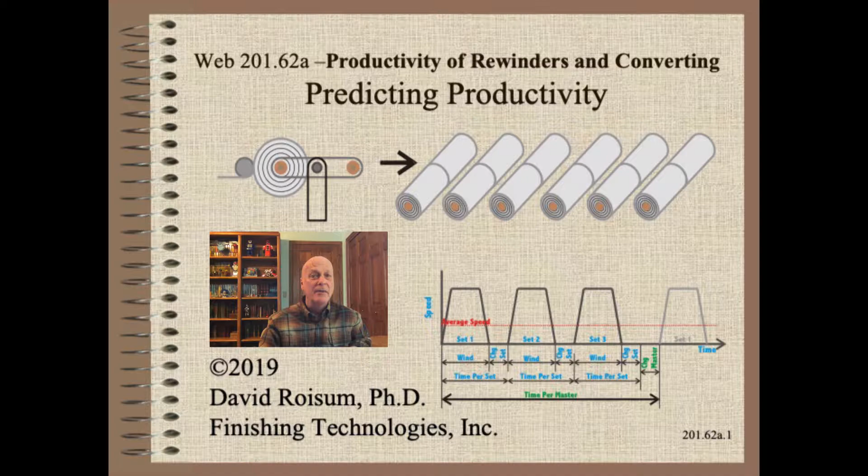The motivation for analyzing productivity is obvious: money. However, we first need to understand the elements of productivity before we can minimize rewinding and converting department costs. One large cost area is labor. It can cost upward of $250,000 for each 24/7 position. Of course, your people aren't paid that much. However, consider that each 24/7 position takes 4 full-time workers to cover. So take the yearly wages of 4 hourly workers times 1.5 to cover benefits, and you get costs that are notable.

Another notable cost includes waste, because each additional process step adds more waste. One example is the waste at the top and the bottom of every wound roll. There are other sources of waste as well. Also, equipment is expensive. A rewinder may cost $20,000 to $20 million. Converting equipment can even cost more. To this initial cost, we also must add ongoing maintenance costs such as parts and labor.

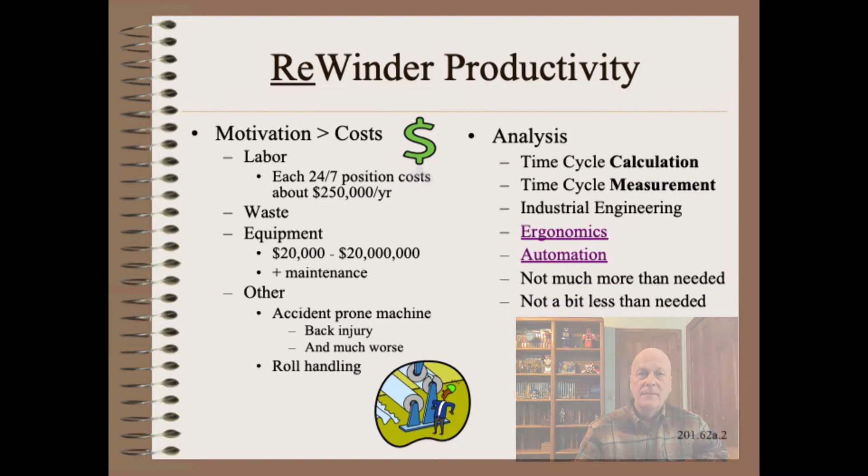The heart of a rewinder time cycle is the speed versus time graph. Here we show the heartbeat of an athlete, strong and steady. In this example, we are rewinding 3 sets per master roll. Of course, the technique would apply to any number of finished sets per master roll, from 1 to 100. Note the repeating elements: accelerate, run, and decelerate, followed by a finished roll set change. At the end of the 3 sets, we must add time to change out the master roll.

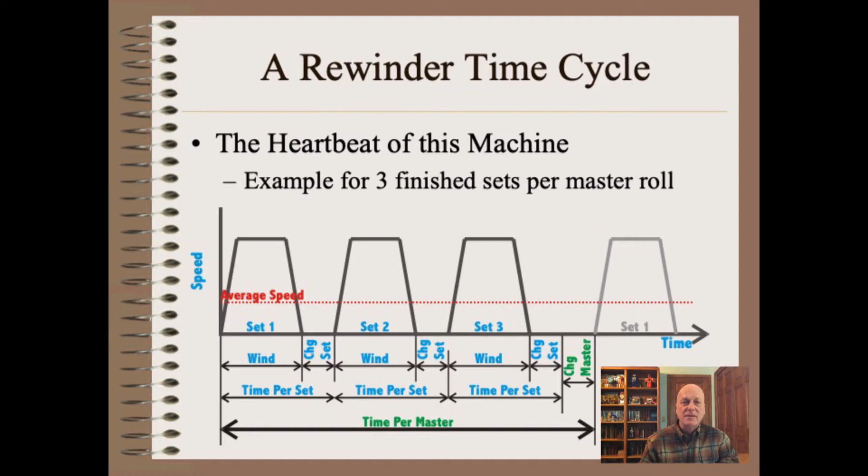The individual times for each of these elements can be calculated and summed to give the time to process 1 master roll. Since we must know the length of the master roll, the average speed or productivity of the rewinder is the length divided by the time per master roll. This average speed is like the problem of the tortoise and the hare. The rewinder varies speed like the rabbit, but must keep ahead of the steady input from manufacturing, like the tortoise.

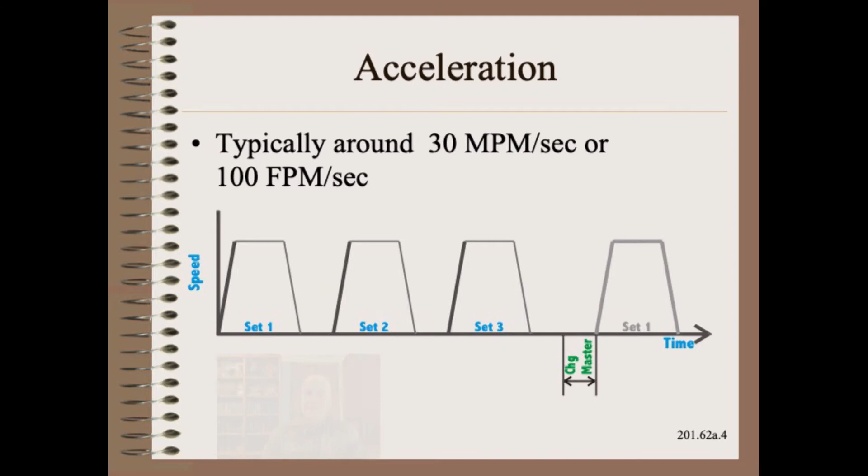The acceleration rate is set by the machine builder. It is around 30 meters per minute per second for many rewinders, but noticeably slower for most other R2R converting machines. Run speed is typically 50 to 80% of design speed, though there is notable variability here. For example, salvage winders tend to run quite slow, perhaps due to poor oversight, or perhaps the do you want it good or do you want it fast fallacy.

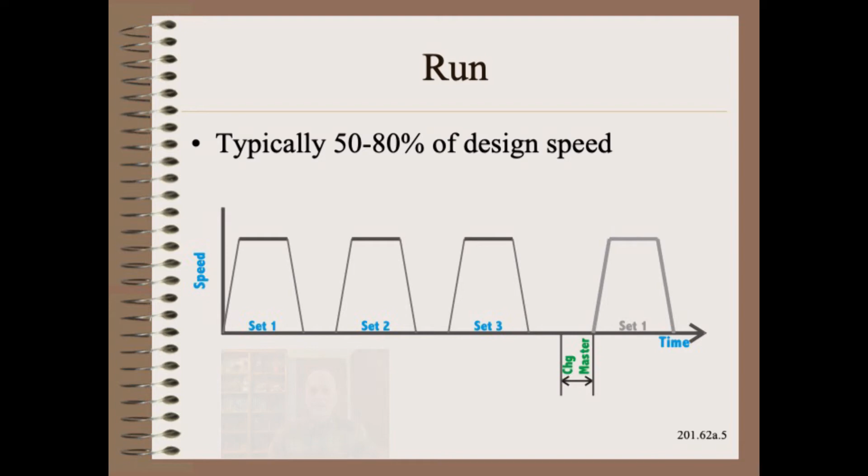The deceleration rate is set by the machine builder and is around 40 meters per minute per second for many high-speed rewinders. The rate we are referring to here is the normal stop, where tension is maintained at least to zero speed. An e-stop is an entirely different matter. In an emergency, every torque element goes into maximum braking effort without any attempt to maintain tension or coordinate the stop. Machine builders often size the torque elements for a minimum of 100 meters per minute per second.

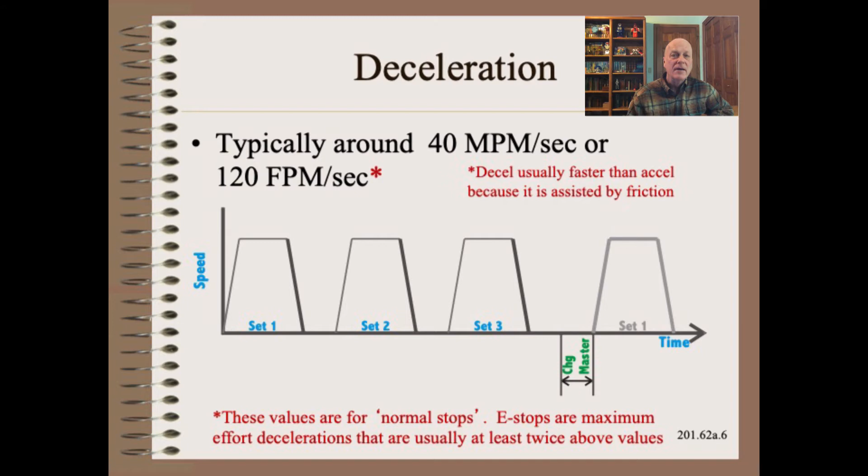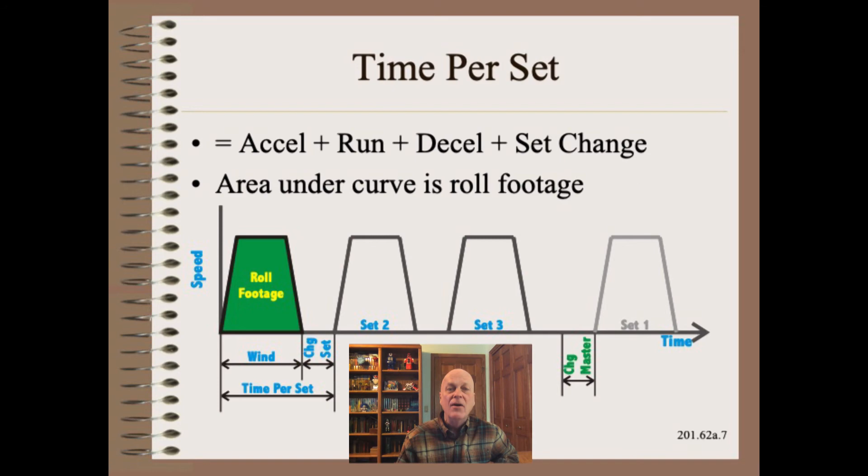The runtime is back calculated from roll footage and the amount of material wound during the acceleration and deceleration. The area under the speed versus time plot is the footage in the roll. To the winding time, we add the time to change out the set of finished rolls to get the total time for one set. Now, we merely repeat the process for each of the remaining finished roll sets in a master. To that, we finally add the time to change out the master. All of these calculations are done with simple high school math.

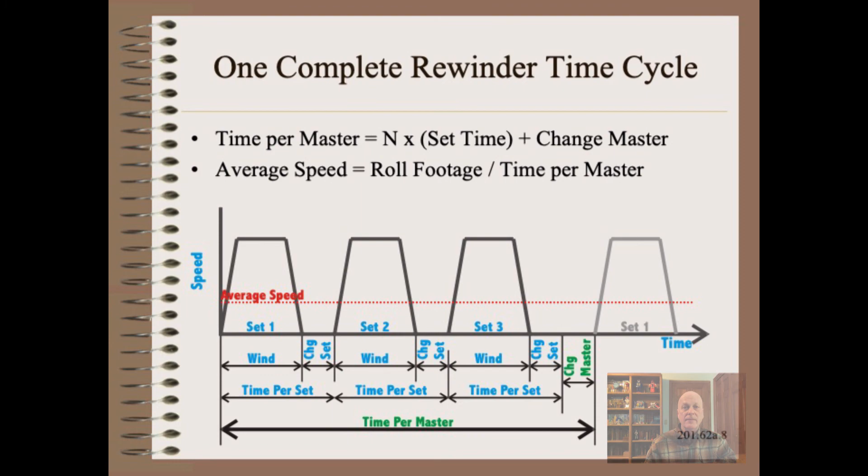Thank you so very much for allowing me to share simple time cycle calculations. In the next clip, we will add additional time cycle elements as well as discuss how to measure productivity.